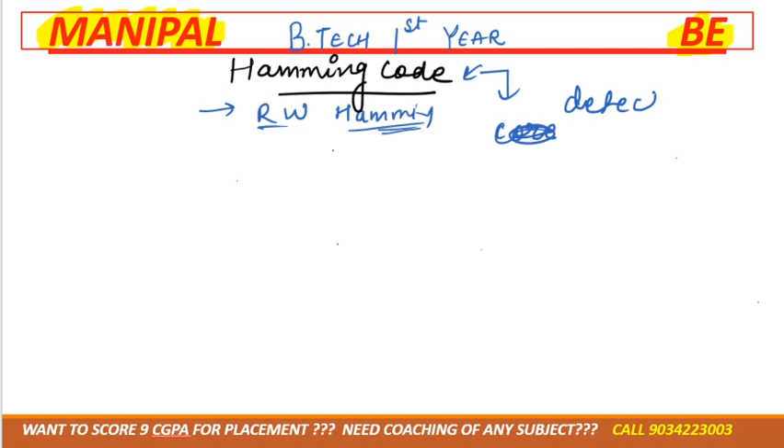So Hamming code basically told the scientific method of correction, how we can detect whether our code is correct or not. That means how will you detect that what you're getting is correct or not, and how will you correct it.

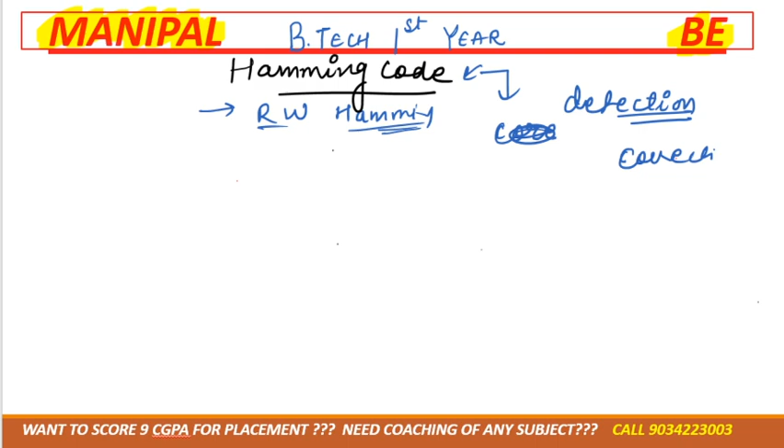Now after that, he told about 7 bit. Besides 7 bit there's 8 bit, 9 bit, but for the basic thing it's 7 bit. Okay? In the paper and in the mobile exam as well, 7 bit.

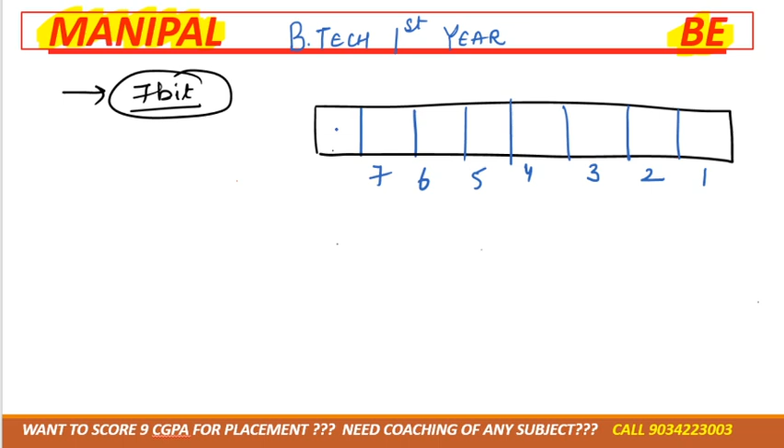4, 5, 6, 7. So it will have a 7 bit code.

This is 7 bit. Now in 7 bit, send only 4 bits of data. The data is only 4 bits, but this is so that you will be able to detect correct data or incorrect data. Okay?

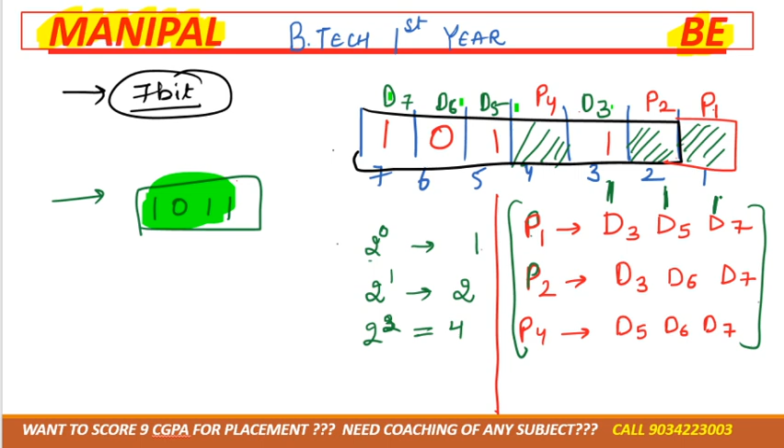Okay, now see, according to this, D3 is 1, D5 is 1, so 1. They are considered for each parity.

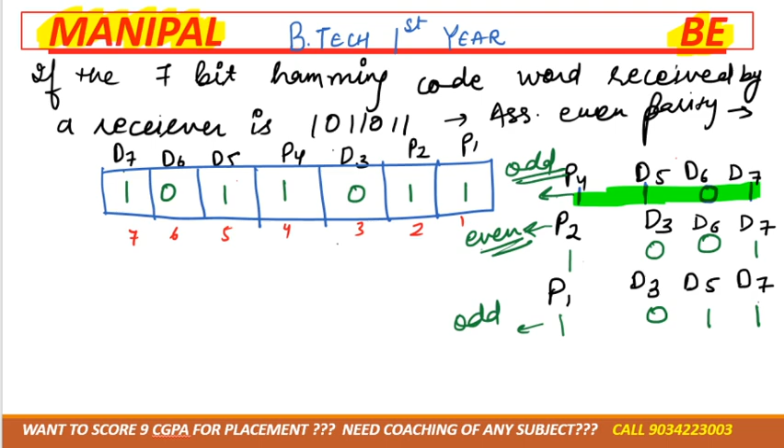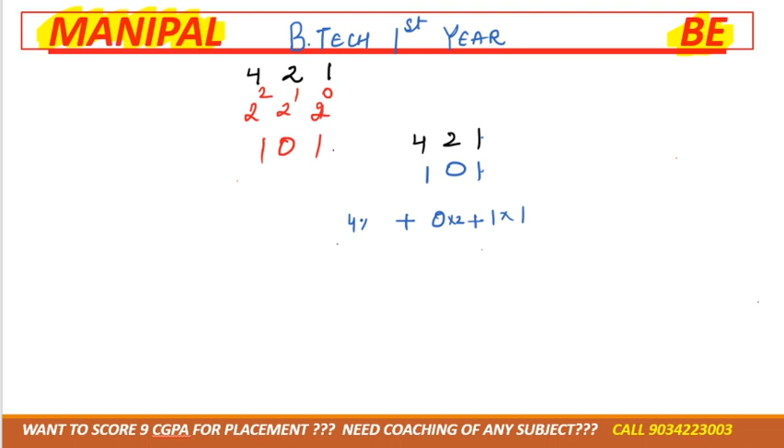1, 1, plus plus, that would be 5.

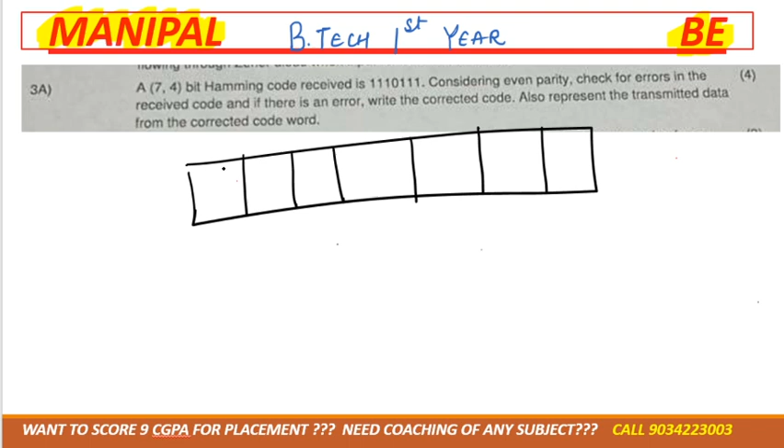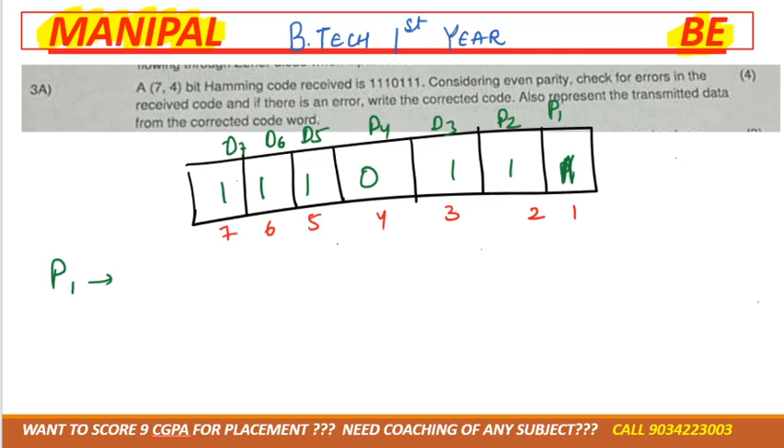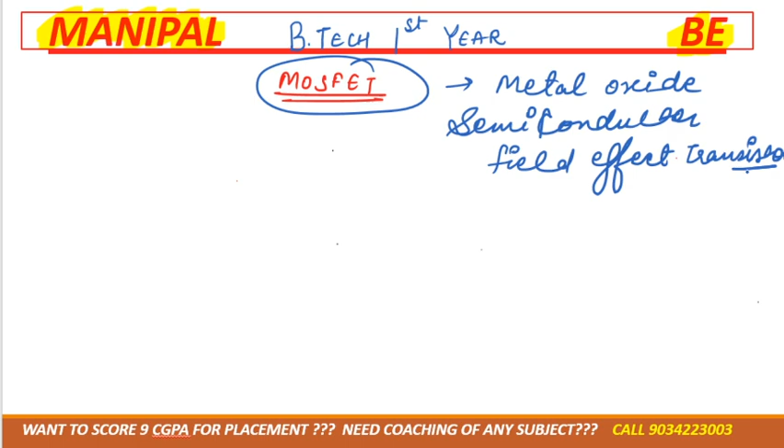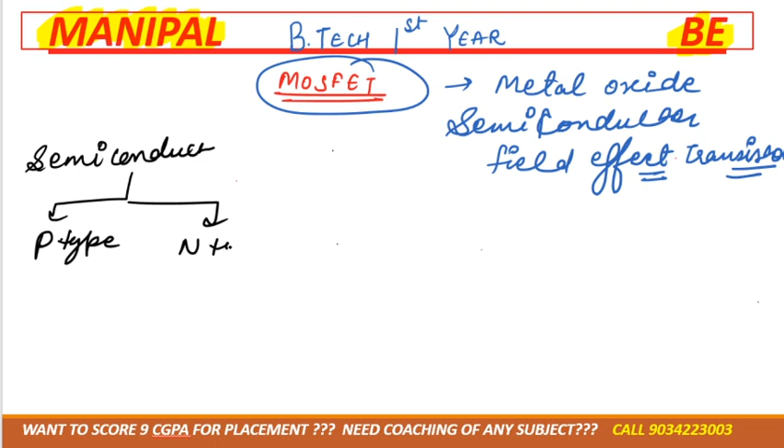Effect transistor. Okay, so basically first we'll have semiconductor, right? As you know about the semiconductor, it is divided into two categories - one is P type and another the N type, correct? So after semiconductor, scientists combine the two types of semiconductor and form a new device that is diode.

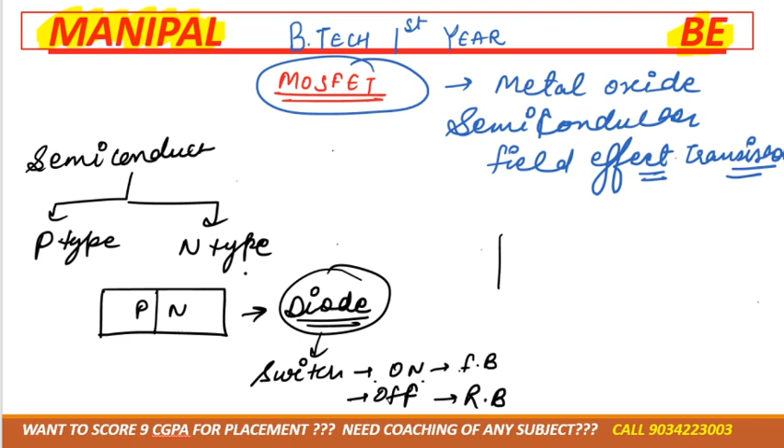Now after making diode, it will act as switch - if it behaves as on, then current will flow. If switch is off, then current will not flow, right? In case of forward bias, this is the case; and this is the case of reverse bias. After this diode, scientists thought that combining three semiconductors will make a new great device.

So if we combine three semiconductors, that would be very good, right? The three semiconductor layers - we can make it like NPN. So technically, this is known as transistor. Combining three semiconductors with each other is known as transistor.

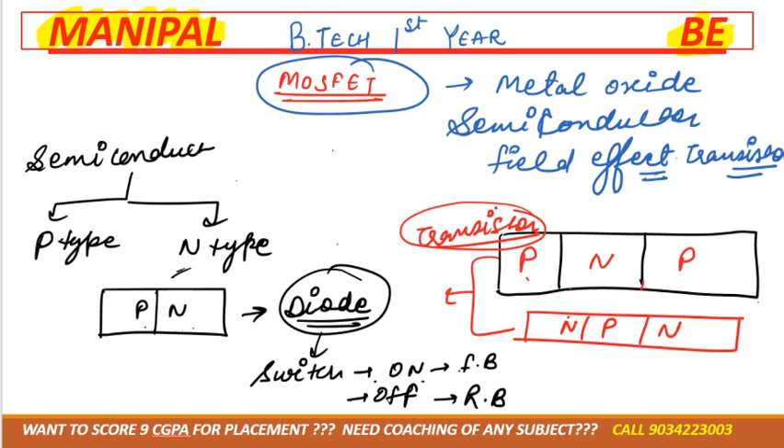Now after that, transistor is basically divided into categories - one is the BJT, other one is the MOSFET. In BJT - earlier, before COVID, it was in your syllabus, now it is not. Now it is MOSFET in the syllabus.

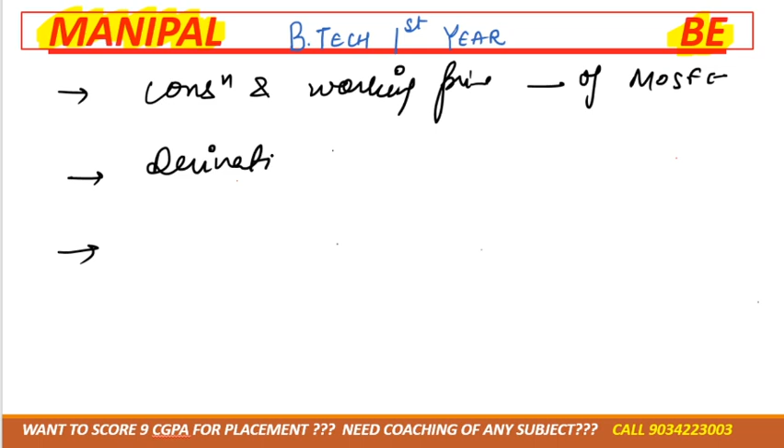Now in the MOSFET, they'll ask you questions. One is the construction and working principle of MOSFET. Another question they can ask is the derivation of drain current, and another question they can ask is numerical based problems. From these topics, maybe we'll get two questions in Manipal, maybe get one question.

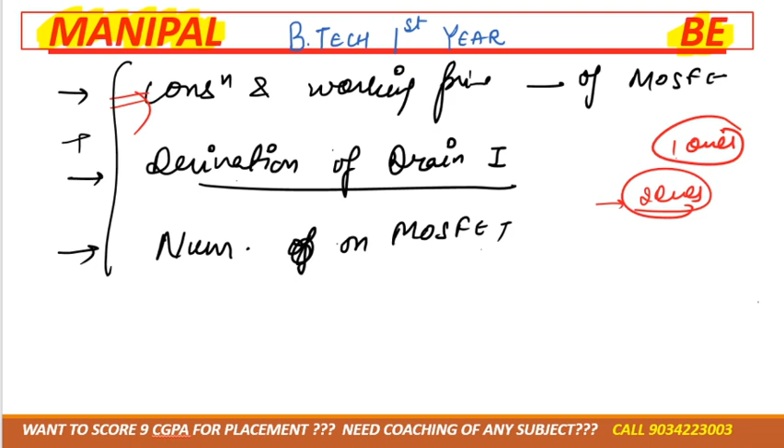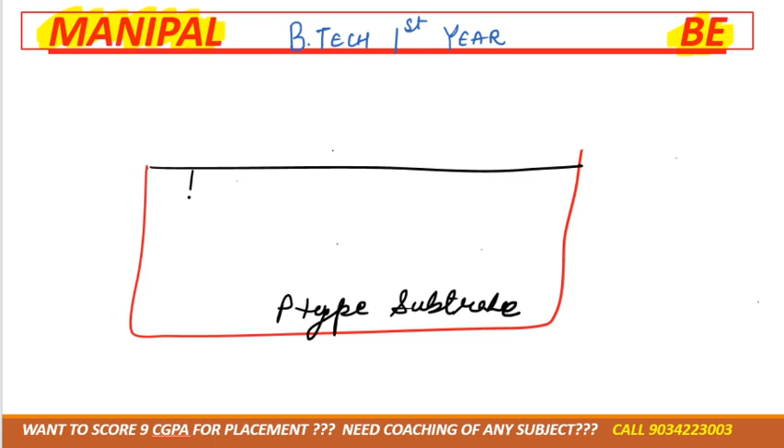So now let's study about the first question - construction and working principle. Now suppose if we have a p-type substrate, the p-type substrate will have a p-type body. Okay, and in this p-type body we have done n-type doping.

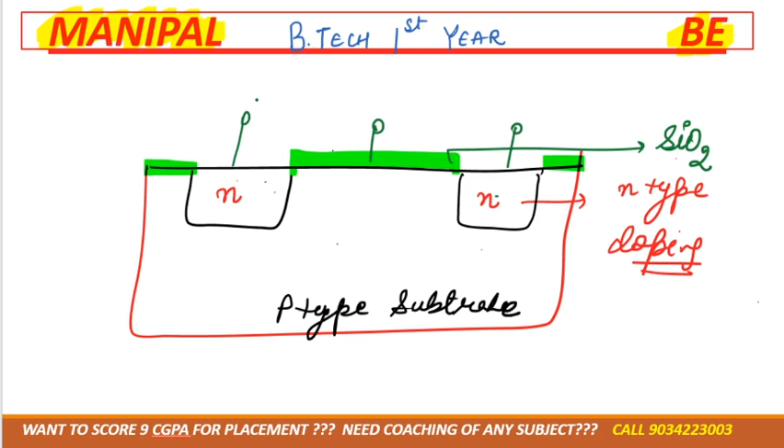After this, we will have basically three terminals - one is the gate terminal, one is the source terminal, and another one is the drain terminal. This is source, this is gate, and this is drain. So see how exactly it works.

Okay, after this, suppose we have three terminals. I'm giving you an example of how MOSFET works - it exactly works like a tap, meaning a water tap.

Like from here, the water supply is coming, right? From the supply we are getting - this is the thing from where we can control the flow of amount of water. Technically this one is source, where the water supply is coming from.

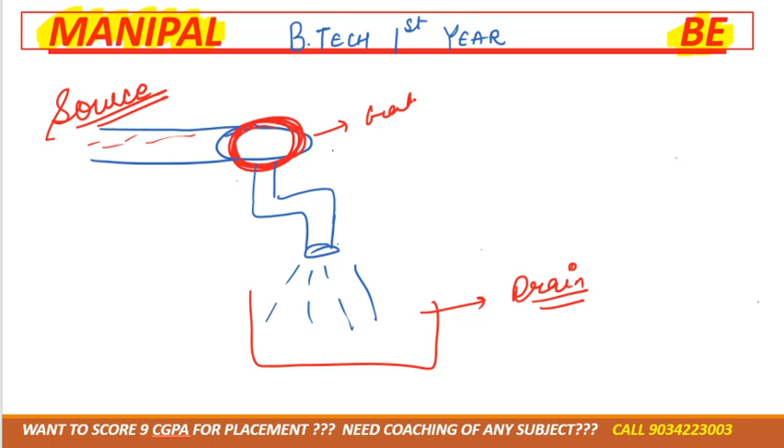This one is drain, where we are getting the supply of water, and this is gate, from where we can control the flow of amount of water. If gate is closed - if you have kept the tap completely closed, then does water come into the drain?

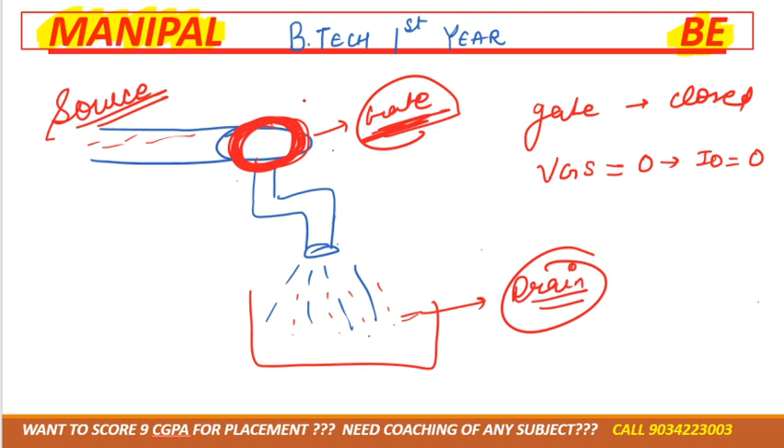Now suppose you suddenly start the flow of the tap - slowly you opened the flow of water, meaning opened the tap. Then accordingly, as much as you opened it, that much water you will get. You'll get water accordingly, yes or no?

Yes ma'am. Now in this case also, if you give the value for VGS, suppose 10, accordingly you will get some drain current. Correct? Now the third condition - you keep opening the tap more and more, but there is a flow of water only up to a limit.

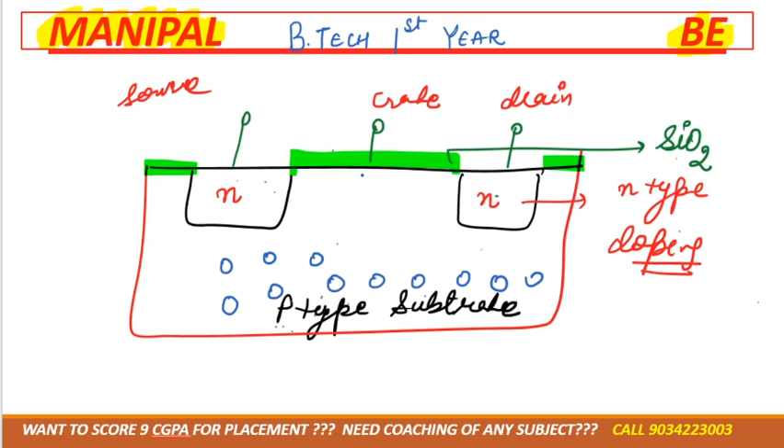Electrons, right? Then this type will have majority carriers as holes. Positive type has hole carriers. That means we'll have less number of electrons. Correct? So now we are connecting this.

Now, this VGS - here the positive terminal, as you can see, is there. It will attract negative charge, not positive charge. Tell me - here the positive terminal is, so it will attract the negative charge, attract the electrons. Correct?

And more electrons collect over here because they can't cross it. Why can't electrons cross? Because we already provided the layer of silicon dioxide. Any doubt up to here?

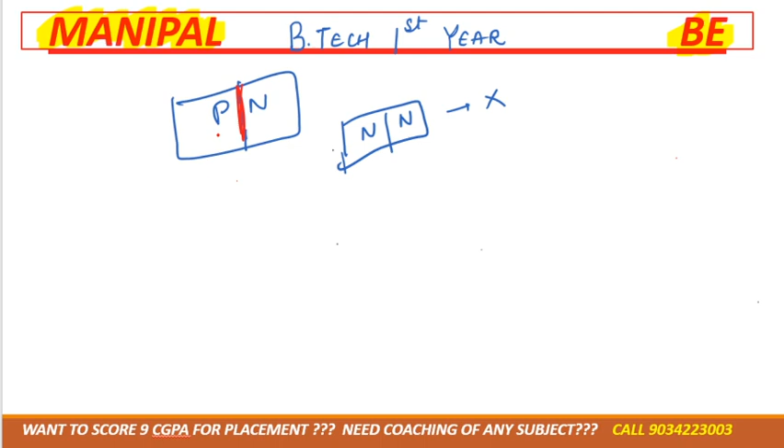Now, when we have the wall, when P and n is - but now as you can see, here all the electrons are there, so n and n region. Here also n, so automatically this wall disappears. It will end, and many electrons will come here.

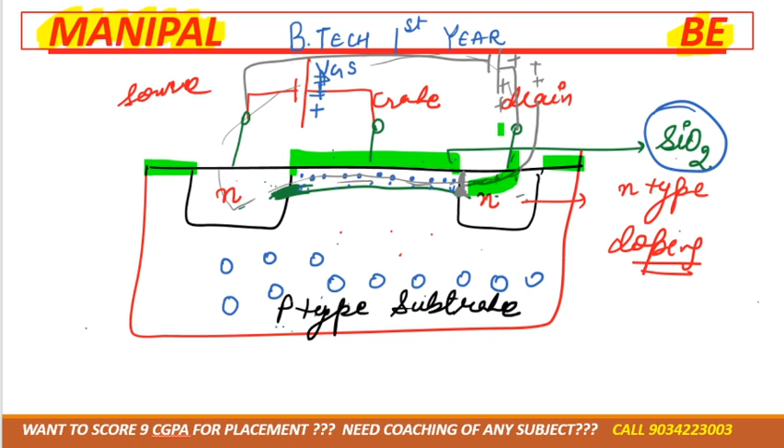So now what will happen is the drain is also positive. So in that case, electrons are there in the n region, so these electrons flow like this - they go up and come from here, because here we'll have positive charge, so positive will attract electrons. Electrons go this way, you can see they flow through the insulation and come over this path and move to this channel. Correct?

So this is technically known as the n channel. What do we call it? N channel. Now see, if we increase the value of VGS...

Then tell me, more and more number of electrons will be attracted over here, right? And if more and more electrons are attracted, then what will the channel width be? It will increase, because more and more electrons means the wall diminishes more. Then after that, more electrons will flow and then more current will flow. So ultimately drain current increases.

Okay, take the vice versa situation. If we decrease the value of V, decrease it, then less number of electrons are attracted here. Less electrons attracted means the channel becomes thinner, narrow. Then in that case, less electrons flow and the drain current also decreases.

See, it's the similar case I told you. If VGS is zero, drain current is zero. VGS increase, drain current increase. Then VGS increase further, after that drain current will saturate. Okay, so this is how the MOSFET works exactly.

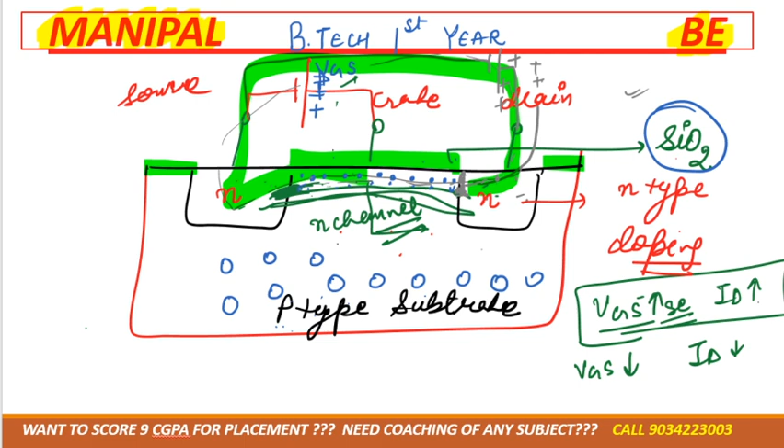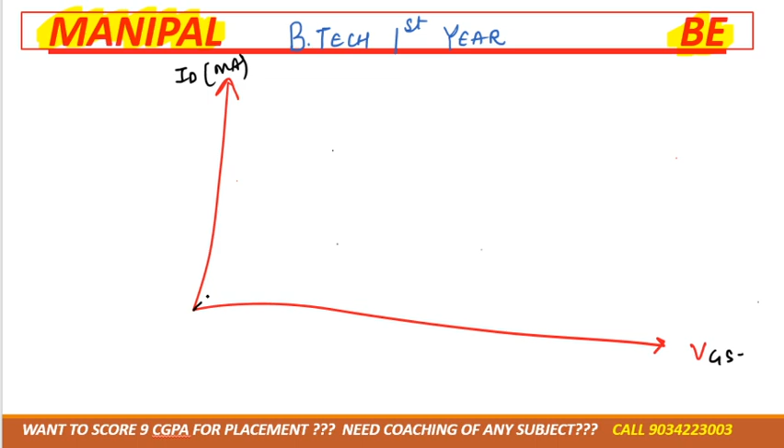Now a graph is there. In this we have voltage on the x-axis, and on the y-axis we have drain current, that is it. Here we'll have V, and in this we'll have... take for different values of V. I told you this value...

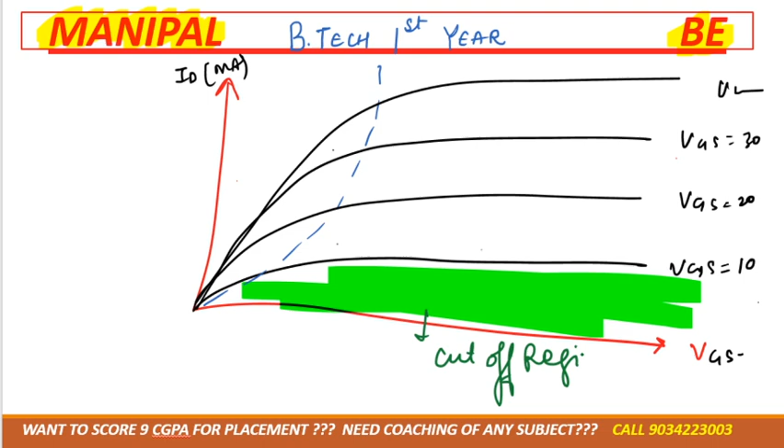So in this we'll have basically three regions. One is the cutoff region, another one is this yellow one, the active region, and this is the triode region.

What is this region? Suppose, as I told you, when your tap is closed, no current will flow, meaning this is equal to 0, so that is the cutoff region - its value is very less.

Then after that, open the tap according to your requirement - you opened the tap, then you'll have water flow, then you will have the active region, working normally.